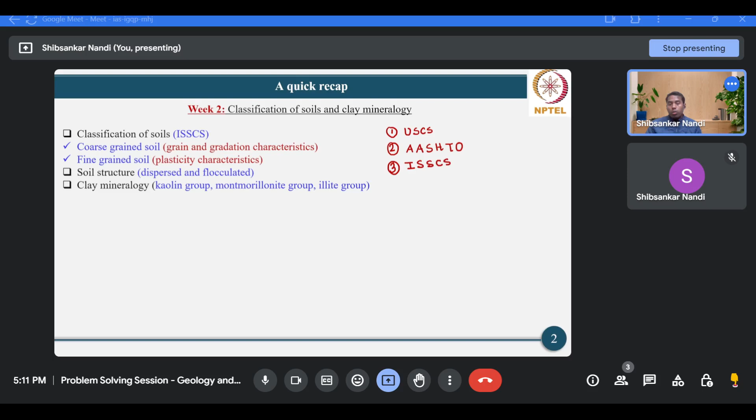And this topic is also very essential for a thorough understanding of soils which contain these mineral groups. Okay, so with this we'll move on to the problem solving part of this session.

As you know, in the last week we started solving a problem which is based on, or framed on the basis of, sieve analysis and hydrometer analysis, and we couldn't solve the problem entirely in that session due to lack of knowledge. By that time we didn't know about the soil classification system, so we restrained ourselves only to the calculation procedure.

Now in this session we'll again start that problem by classifying the soil. Okay, so before that we'll read the problem statement once.

The problem states that 500 grams of soil taken from Kanpur, Uttar Pradesh were brought to a soil lab for testing of grain size distribution. The weight and number of each sieve for sieve analysis is given in table 1.

In table 1, two columns are there. In the first column, sieve size, which are the size of sieves used in the analysis, is given, and in the second column the corresponding sieve weight is also given.

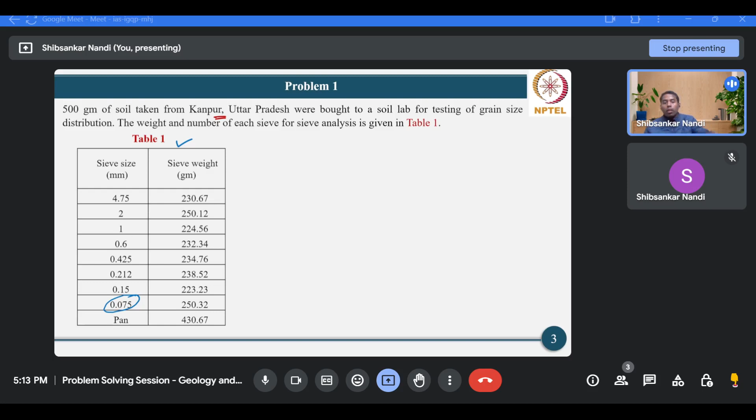Now after the sieve analysis, the weight of each sieve along with the soil is given in table 2. It is to be noted here that during sieving, a small fraction of the sample taken was lost as dust.

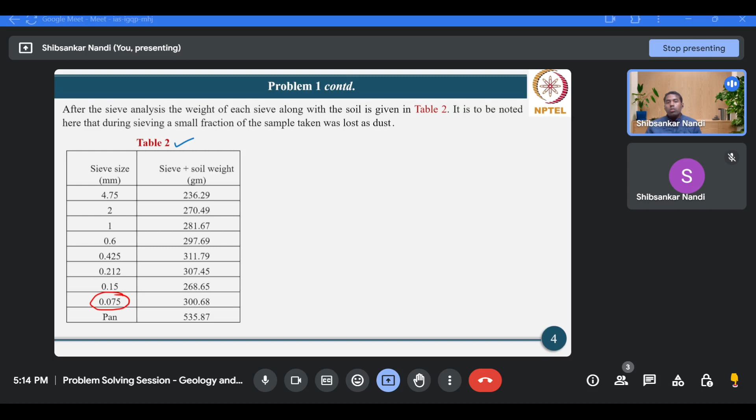In addition to table 1, in table 2, the weight of sieve and the retained soil is given corresponding to each sieve size, starting from 4.75 mm to 0.075 mm. It is explicitly mentioned in the problem statement that while the sieving operation was done, a small fraction of the sample which was earlier taken, that is 500 grams, was basically lost as dust. That we have to keep in mind.

Now coming to the hydrometer analysis part. A hydrometer analysis was performed on the same soil by taking 40 grams of the sample retained in the pan. This is the standard procedure. As you know, this hydrometer analysis is primarily performed for the finer portion or finer fraction of the soil. So there are two different methods.

The first one is sieve analysis, as we have seen, and the second one is this hydrometer part. Sieve analysis is basically performed for the coarser fraction of the soil, and hydrometer analysis is performed for the finer fraction - finer in the sense the portion which has passed through the 75 micron sieve. So the soil retained in the pan, out of this soil, 40 grams was taken for hydrometer analysis.

The hydrometer immersed in a soil solution of 1000 ml was read at specific timings as given in table 3. These are the readings obtained from the hydrometer analysis, summarized in table 3.

In this specific context, we have discussed two very important facts: to proceed further for hydrometer analysis, meaning the calculation part involved, we have to first calibrate the hydrometer. Calibration in the sense we have to first establish a relationship between hydrometer reading and the effective depth. That we'll see.

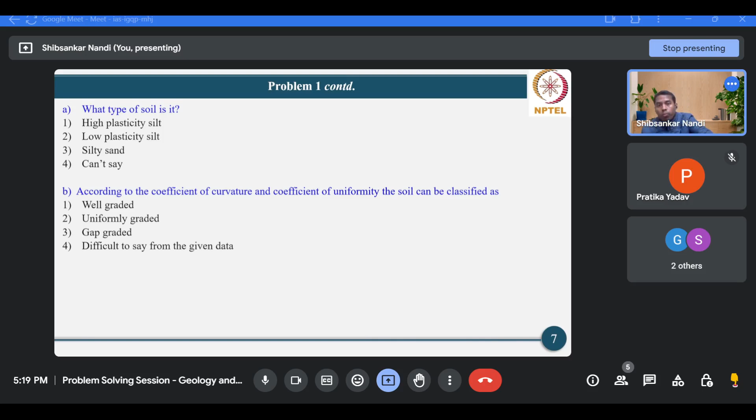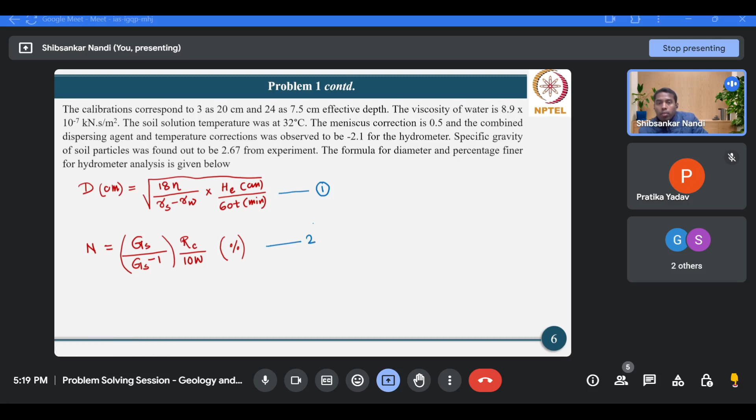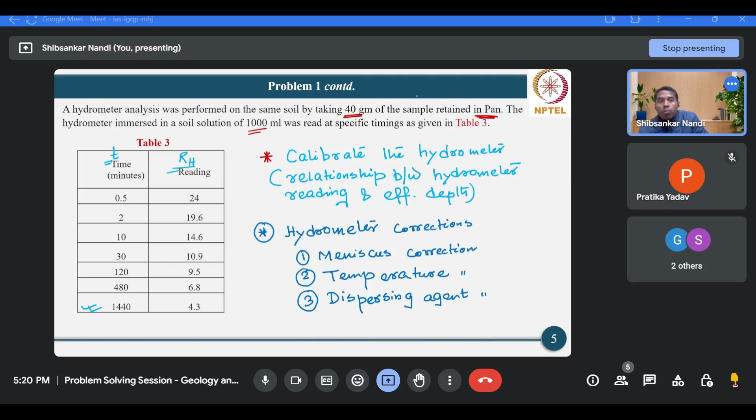The main motto of this problem is to obtain the grain size distribution curve, and depending on that we can make a note whether the soil is well graded, gap graded, or poorly graded, something like that. That is question 1b of this problem. So that's why we have made one correction to get the percentage finer on the total basis.

And how? So in this way, this is the percentage finer with respect to the 40 grams which we have taken. Now this is the fine content, 21.96. How have we got 21.96? So in this way, this much fraction percentage is passing through the 75 micron sieve.

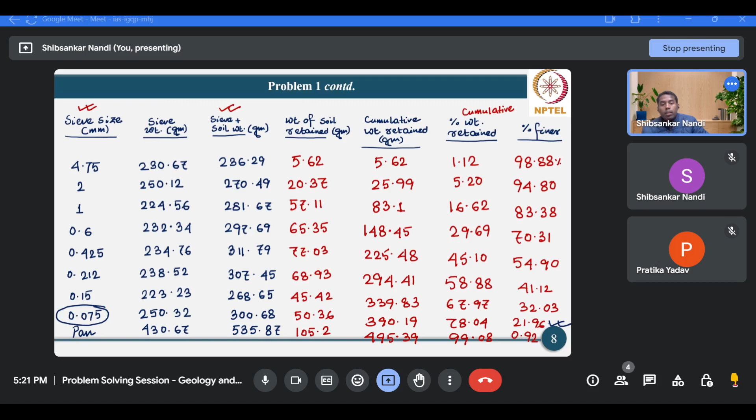Now out of this 21.96 percentage, we have taken 40 grams. So we have multiplied this 21.96 to get it on the total basis, out of 500 grams. This gives how much percentage finer corresponding to a 0.052 millimeter diameter particle. In this way, we have got values like 19.66 and 2.37 corresponding to particle sizes of 0.052 to 0.001.

The actual hydrometer reading or the corrected reading, for time t equals 0.5 minutes, the corrected reading which we have got is 22.4. Now this 22.4 hydrometer reading represents what effective depth? That we can get from this calibration. So if the hydrometer reading is 22.4, then what should be the effective depth? The effective depth should be 8.45 centimeters.

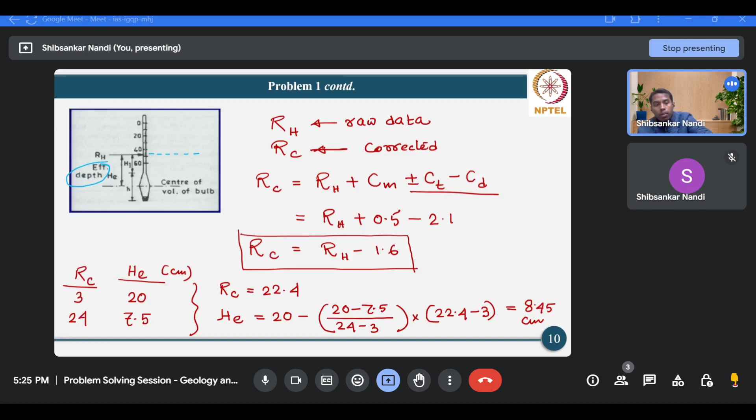Before that, as you know, the first or fundamental step in this ISSCS soil classification system is to categorize the soil sample as to whether it's fine grained or coarse grained.

So for that, we'll first make a division of soil fraction on the basis of grain size.

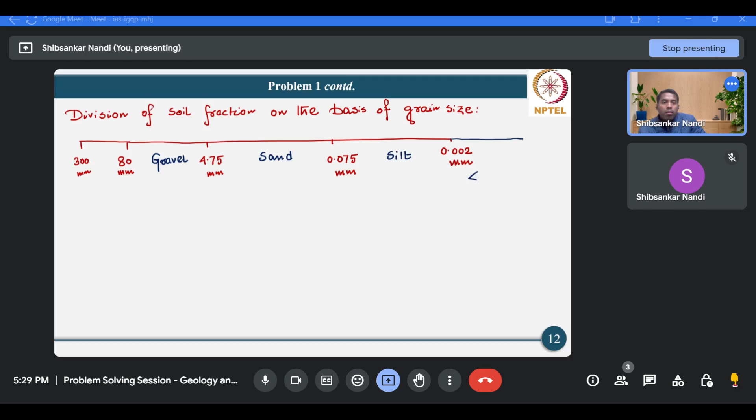Particles of size ranging between 0.002 mm to 0.075 mm, this is called silt. And all particles having a size or diameter less than 0.002 mm, if we extend this line further, falls under the category of clay.

And this division from 80 mm to 300 mm is cobble, and greater than 300 mm is called boulder.

Now again we can subcategorize each of these divisions. Specifically for 4.75 to 0.075, we can make a distinction like coarse sand, medium sand, or fine sand. Similarly, gravel can be categorized into coarse gravel or fine gravel. We are not going into that aspect because that is not needed at all, at least for solving this particular problem.

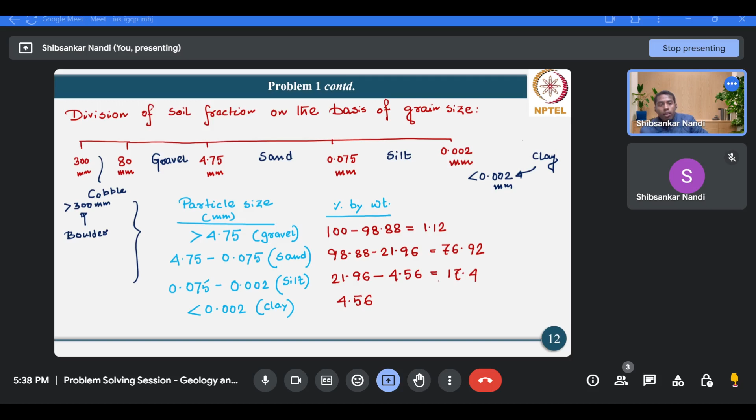Now we'll do the first check: whether 50% of the total soil is passing through the 75 micron sieve or not. Depending on that, we'll categorize the given soil as fine grain or coarse grain. Only 21.96 percentage of the total soil is passing through the 75 micron sieve, meaning more than 50% is retained or is coarser than the 75 micron sieve. So this indicates the given soil sample is coarse grain, not fine grain.

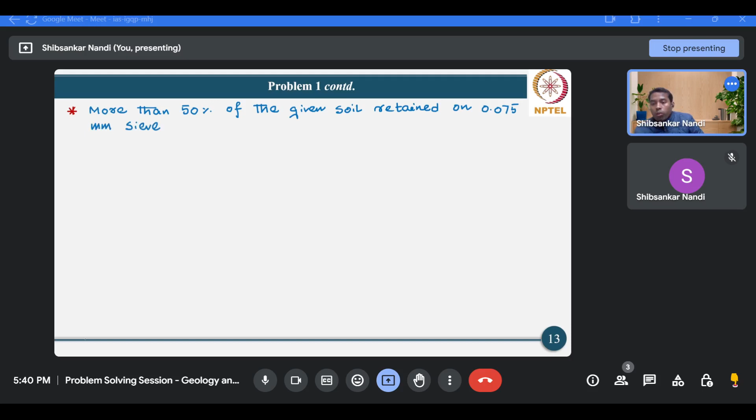So how are we categorizing the given soil sample as coarse grain? Because more than 50% of the given soil is retained on 0.075 mm sieve. We can infer from this observation that the given soil sample is coarse grained in nature.

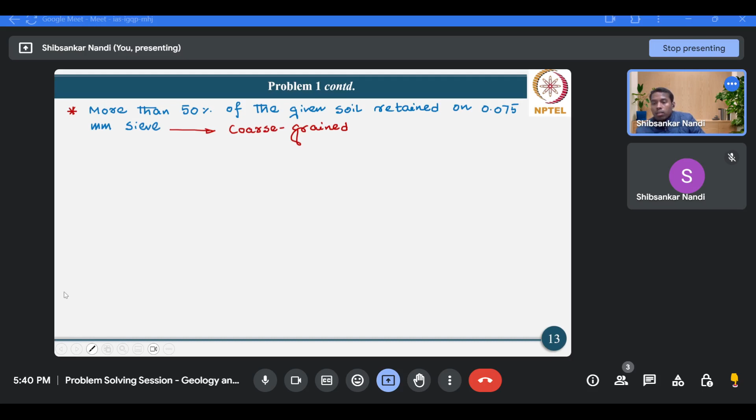Now we'll again subclassify the soil sample. This is the second check. First we classified the given soil sample as coarse grain on the basis that more than 50% of the given soil is retained on the 75 micron sieve.

Now we'll again subclassify. We'll check, out of this coarser fraction, how much percentage is retained on the 4.75 mm sieve, or indirectly how much percentage of this coarse grain fraction is passing through the 4.75 mm sieve. On that basis you can subclassify the soil sample as sand fraction or gravel fraction. In this table I have written NA for these coarse fractions.

So these are the coarse fractions, and these two are the fine fractions. The coarse fraction is 76.92 plus 1.12, that is 78.04 percentage. Obviously the remaining 100 minus 78.04 will be the fine fraction.

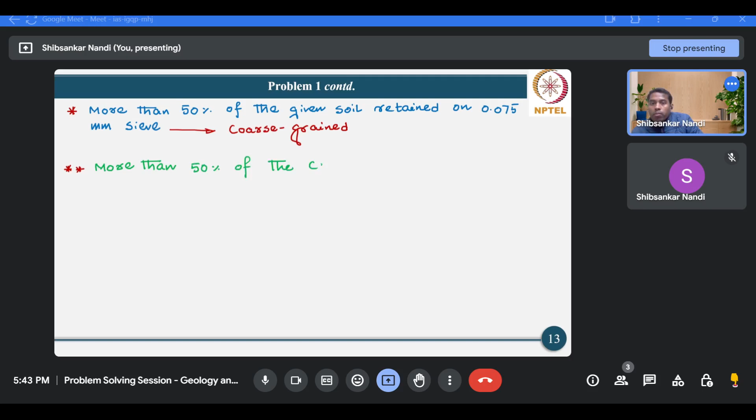On a percentage basis, if we take this 78.04 as 100%, then we can easily say more than 50% of the coarse fraction is passing through the 4.75 millimeter sieve, which indicates the sample is sandy in nature. So our second observation, based on the second check, is that more than 50% of the coarse fraction—particles coarser than 0.075 mm—passes through the 4.75 mm sieve.

Therefore, the soil is sand. So first we have classified the soil sample as coarse grained, then in the second step we have classified it as sand. Now we'll further classify the soil sample.

on the basis of fine content. Once the soil is classified as coarse grained or fine grained, depending on that we decide the next criteria for further classification. For coarse grained soil, gradation and grain characteristics will be predominant, while for fine grained soil the plasticity characteristics will be predominant. So for coarse grained soil you classify on the basis of grain and gradation characteristics, whereas for fine grained soil you classify on the basis of plasticity characteristics.

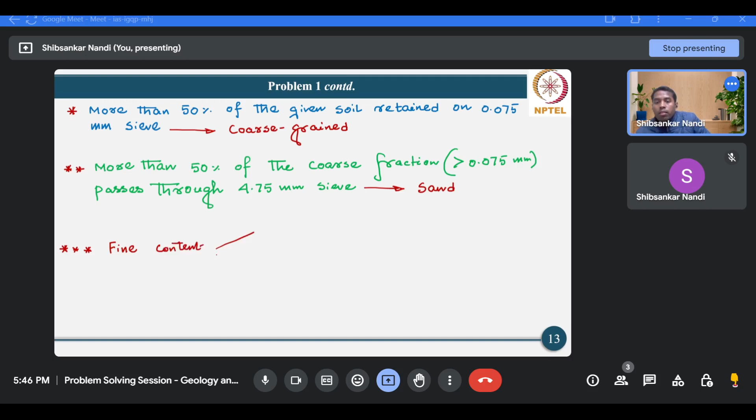Now for the given problem, as the soil is coarse grained and more specifically sandy in nature, we have to go by its grain or gradation characteristics. But before that, we have to check whether the fine content is less than 5%, or in the range of 5 to 12%, or more than 12%. These are the three checks for further classification of the given soil sample.

5%, 5 to 12%, and more than 12%. If the fine content is less than 5%, you classify the soil sample as well-graded sand, poorly graded sand, well-graded gravel, or poorly graded gravel. For the given problem, since the soil is sandy in nature, you apply either poorly graded sand or well graded sand.

But that is only for the case when the fine content is less than 5%. This is not the case here. You can easily observe the fine content. Now what does fine content represent? The fine content is the fraction of the total soil passing through the 75 micron sieve.

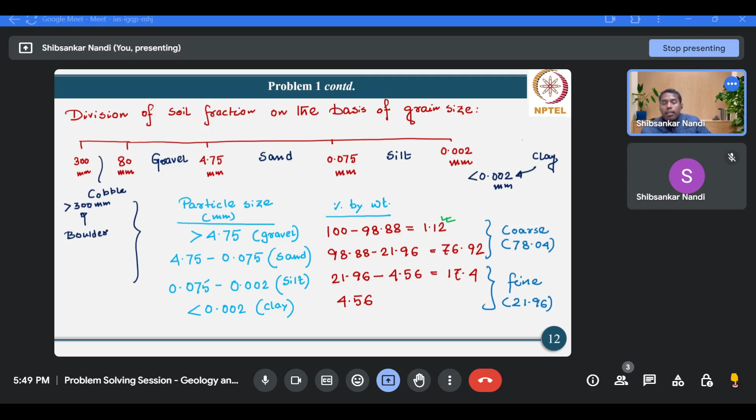However, roughly we can say, because as you can see from this table, out of this 21.96 fine content, the silt percentage is 17.4, whereas the clay percentage is 4.56. So very nominal, the clay percentage is very small. Therefore, at this moment you can say that the soil is silty sand.

So here I am writing that the silt percentage, this is the valid case for this problem. I am highlighting that percentage silt is greater than percentage clay. So clay is 4.56 and the silt percentage is 17.4.

So roughly we can say that the soil is silty sand. And what would be the group symbol for this type of soil? The group symbol would be SM. The prefix S indicates sand and the suffix M indicates silt. So the soil is silty sand.

So this is the correct option, option 3, this is the correct answer. So what type of soil is it? The soil is silty sand. That means option 3 is the correct answer.

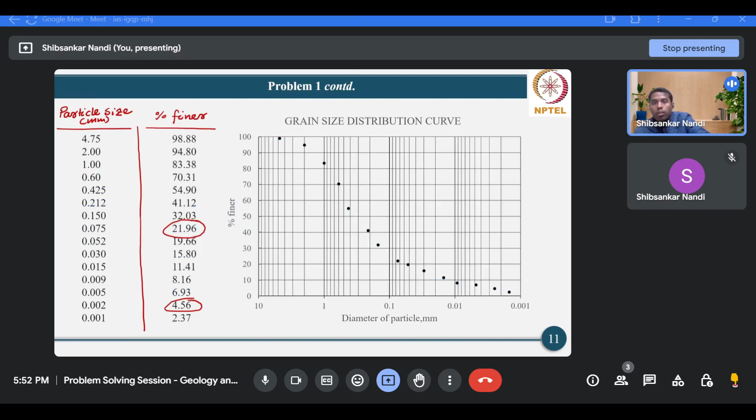Now this is - for this part the data of problem 2 is required, so that we'll see later. But before that, we'll address the second question: according to the coefficient of curvature and coefficient of uniformity, the soil can be classified as well graded, uniformly graded, gap graded, or difficult to say from the given data. So we'll concentrate on this aspect now.

This is the grain size curve. Now you have to make a statement on the gradation characteristics of the given soil on the basis of two constants: the coefficient of uniformity, Cu, which is the ratio of D60 by D10, and the coefficient of curvature, represented as D30 squared divided by D60 into D10.

Now what are these D10, D30, D60? These are nothing but the particle size corresponding to 10% finer, 30% finer and 60% finer respectively.

So if we denote D60, D10 and D30 on this grain size distribution curve, you can draw a horizontal line from 60% finer. From the value of 60% finer, draw a horizontal line, and the line intersects the grain size distribution curve at this point. The particle size corresponding to this intersection point would give you the D60 value.

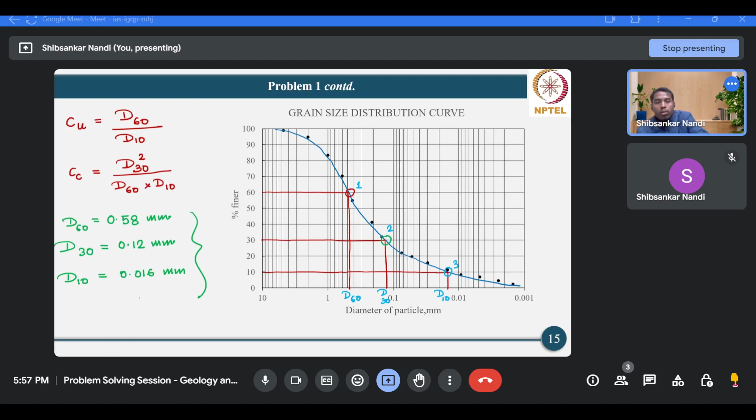Now we'll calculate this value Cu and Cc. So Cu, this would be 0.58 by 0.016. So 0.58 by 0.016, this is 36.25.

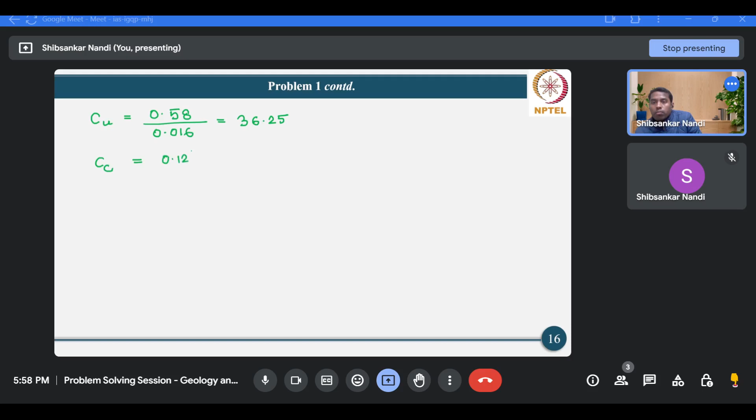And Cc, D30 squared, that means 0.12 squared divided by 0.58 into 0.016. So that means 1.55.

Now, what is the criteria based on which we can make a comment on its gradation properties or gradation characteristics, whether the soil is well graded, gap graded, or poorly graded? What is that criteria? Since the soil sample is sand, for sand, if the Cu value is greater than 6, and if the Cc value is in between 1 to 3...

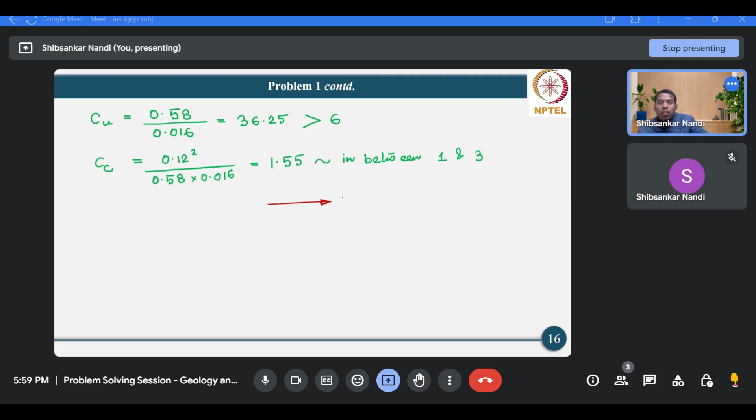Now, without calculating these two parameters, that is the coefficient of uniformity and coefficient of curvature, you can still classify or comment on its gradation characteristics only by observing the grain size distribution curve.

As you can see, the present grain size distribution curve covers particles having size over a broader range. So the given soil sample has particles of size over a broader range, basically containing varieties of particles. So you can say that the given soil sample is well graded.

Now if this is not the case, for poorly graded you will be having a curve something like this. If I draw it for poorly graded, then the soil is deficient or has excess particles of a particular size, or we can say all the particles are basically having the same size. So the gradient will be very steep. This is for the poorly graded case.

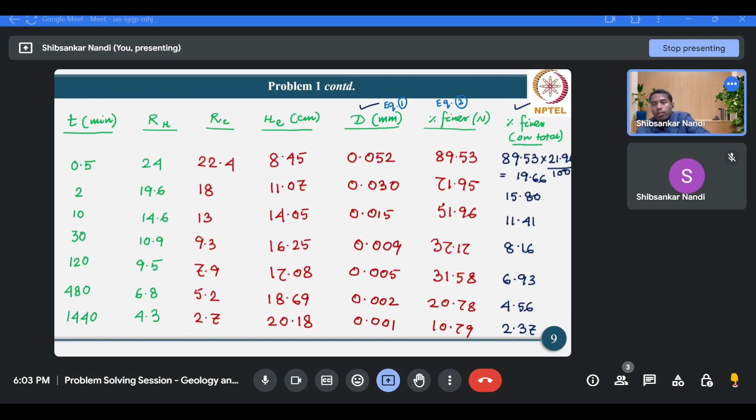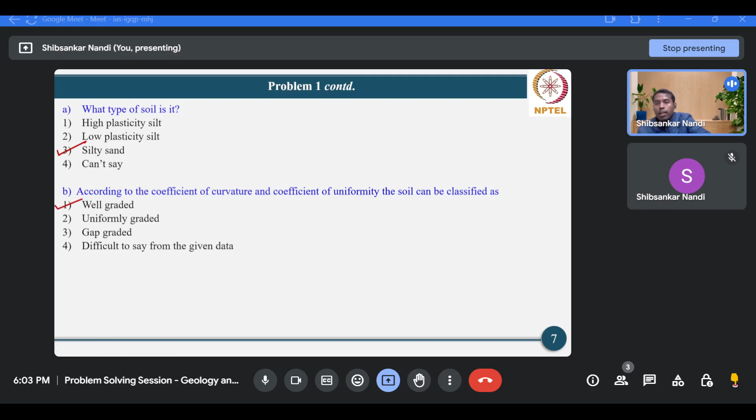Now for this problem, since the Cu value is greater than 6 and the Cc value is in between 1 and 3, the given soil is obviously well graded. So this option is correct, option 1 is correct. According to the coefficient of curvature and coefficient of uniformity, the soil can be classified as well graded. So option 1 is the correct answer.

So far we have addressed the two questions which were framed in the last class. Now we'll go for the second problem. The second problem is about the Atterberg limit test conducted on the soil sample given in problem 1, that is the same soil we are dealing with.

For liquid limit, the data set obtained for the soil is given in table 4. The plastic limit for the soil is 23. Assume the soil to be fully saturated at liquid limit and plastic limit. If the oven dried remolded soil of 250 cc volume kept for 24 hours in oven weighs 595 grams, what is the shrinkage limit of the given soil? That means you have to determine the shrinkage limit of the given soil, where the plastic limit and liquid limit of the soil are given.

The plastic limit is given directly for this problem. However, the liquid limit is not given directly, but you can obtain this liquid limit from the data given for this problem, that is, number of blows versus water content. Now before determining all these limits, we'll have a quick look at what Atterberg limits are.

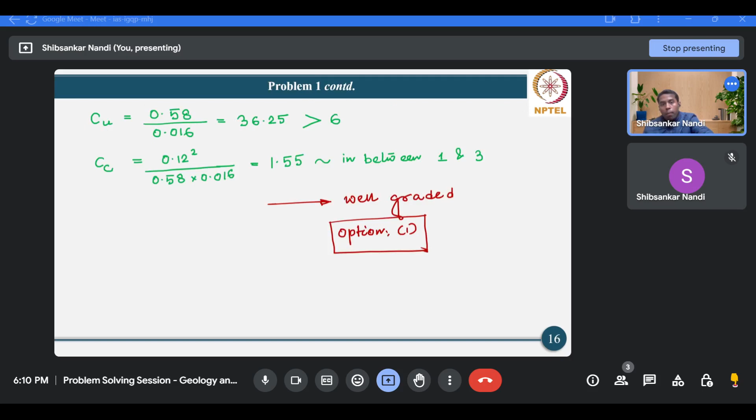Now we'll cross check the soil classification from the first problem, because for a more accurate classification we have to consider the location of the soil in the plasticity chart, whether it is plotted above or below the A line, since the fine content in that problem was more than 12%. We had classified the soil sample approximately as SM, so we will re-verify that.

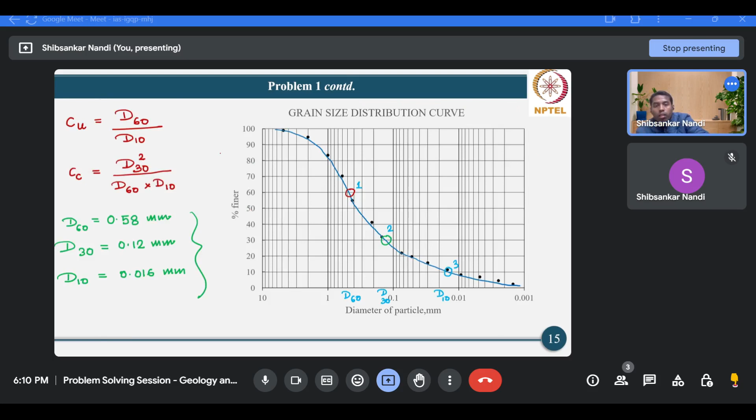Now what is the WL for the given soil sample? WL is 27 and WP is 23, which means the plasticity index is 4.

The equation gives 0.73 times WL minus 20, that is 0.73 into 7, equals 5.11. So corresponding to a liquid limit of 27%, the plasticity index from the A line equation is 5.11, but here the actual plasticity index value is 4.

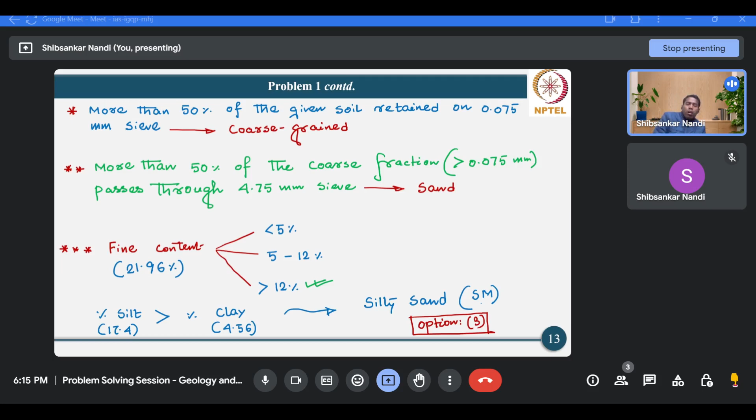So the soil is plotted below the A line, which means the fine content is silty in nature, and as a whole we classify the soil sample as silty sand, which we have done earlier. So that means the earlier classification was correct. This was a check to see whether we had done it correctly, and we can conclude it was correct.

Now we'll see how we can determine the shrinkage limit by utilizing the data of problem 2. So for determining the shrinkage limit, we first obtain the plastic limit and liquid limit.

The plastic limit is given as 23%, and the liquid limit we determined by plotting the water content versus number of blows data to obtain the flow curve. In this flow curve, the water content corresponding to a number of blows of 25 gives you the liquid limit, and that is 27%.

Now we'll basically have an idea about the volume change versus water content, because this idea is very much needed before determining the shrinkage limit of the given soil.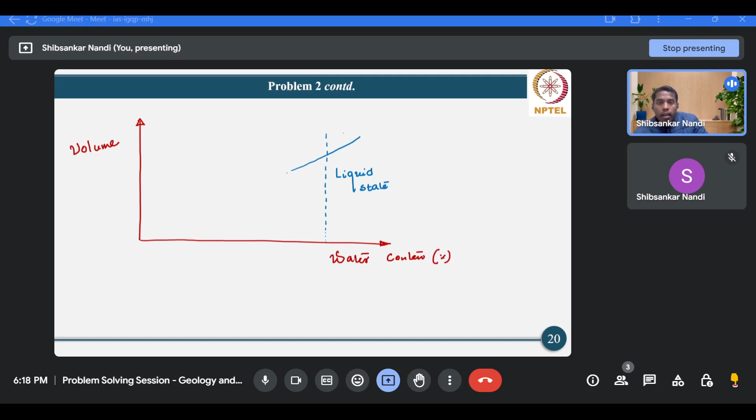Suppose this is the liquid state, where the soil suspension can easily flow without resistance, meaning sufficient water is present and the water content is too high. Now if you try to reduce the water content of the suspension, the volume will accordingly decrease, and there is a borderline where the soil basically enters into a plastic state from the liquid state.

Now what does plastic state indicate? It's the consistency of a soil where the soil can be deformed into different shapes without any fracture or rupture. That state is designated the plastic state.

And the borderline water content, as we defined earlier, is the liquid limit, which is the water content that is the borderline between these two states, that is the liquid state and the plastic state.

First let me plot the variation of volume with water content. So these are the different states of a soil: liquid state, plastic state, semi-solid, and finally solid.

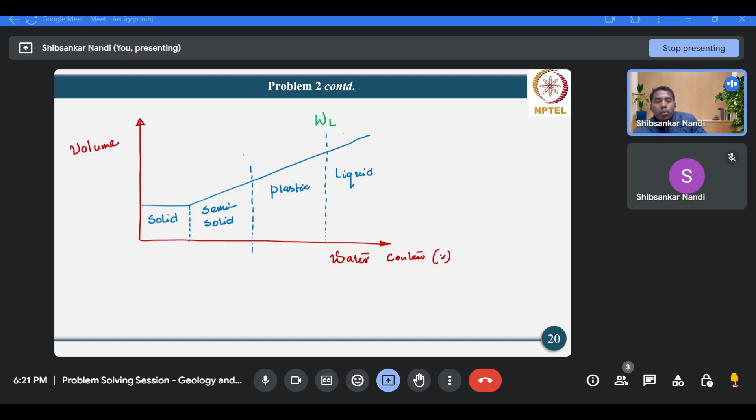Now this borderline water content between liquid state and plastic state is called the liquid limit of the soil. Similarly, the borderline water content between plastic state and semi-solid state is called the plasticity limit or plastic limit.

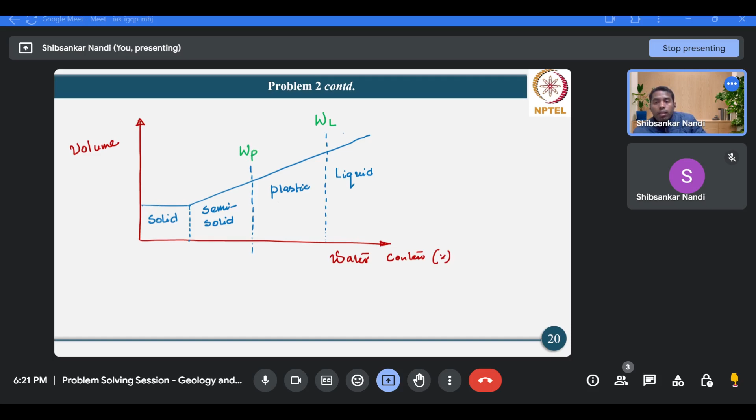And the water content between solid state and semi-solid state is called the shrinkage limit. So these are the three Atterberg limits which define the borderline between different states of a soil.

So the borderline between liquid and plastic state is called the liquid limit. Between plastic and semi-solid, the water content at which soil enters semi-solid state from plastic state is called the plastic limit. And the maximum water content below which there is no change in volume is called the shrinkage limit.

So these are the three Atterberg limits you can get from this volume versus water content plot. If you decrease the water content, the soil consistency changes from liquid to plastic, then semi-solid and solid state, giving you the liquid, plastic and shrinkage limits. Now in this problem, the liquid limit and plastic limit are known to you.

What you have to do is basically calculate the shrinkage limit of the soil, and that we'll see how we can calculate the shrinkage limit of the soil.

Before that, we'll basically plot the three-phase diagram of a soil sample. So again, we'll go back to the problem statement, and we can observe that there is an explicit statement in the problem that we assume the soil to be fully saturated at liquid limit and plastic limit.

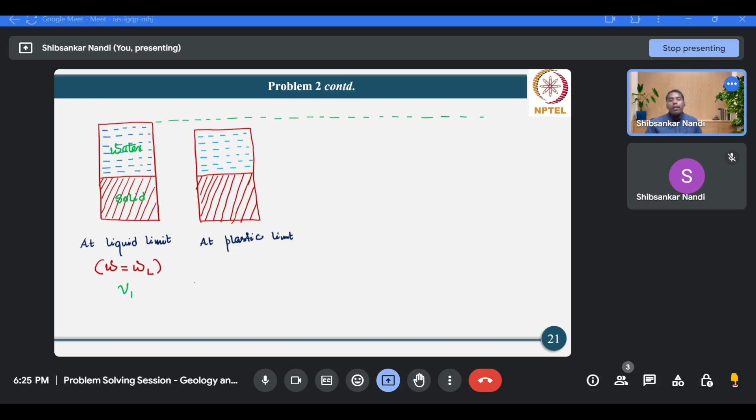Now consider the case of plastic limit. What happens here? In plastic limit, the water content is nothing but the plastic limit, and it is lesser than the liquid limit, that we know. And what happens to the total volume of the sample? The volume is now reduced compared to the volume at liquid limit. So at liquid limit, if the volume is V1, in this case you will be having a volume V2, which is lesser than V1.

So with a decrease in the water content, your volume is also reduced, and that is pretty much clear from this graph. As you go on decreasing the water content, your volume is also decreasing.

Now keep in mind this reduction in volume is only due to reduction in the volume of water, because solid content cannot change. Whatever volume of solid is present, that will remain constant irrespective of these limits: liquid limit, plastic limit, shrinkage limit. Only the volume of water is basically changing inside the voids, and that will be reflected in the total volume of the soil sample.

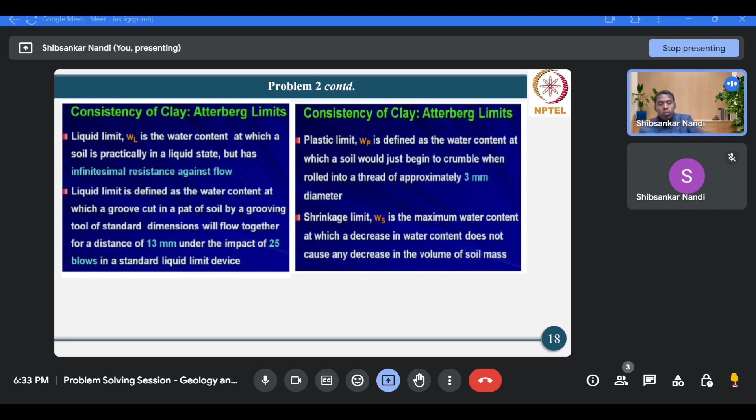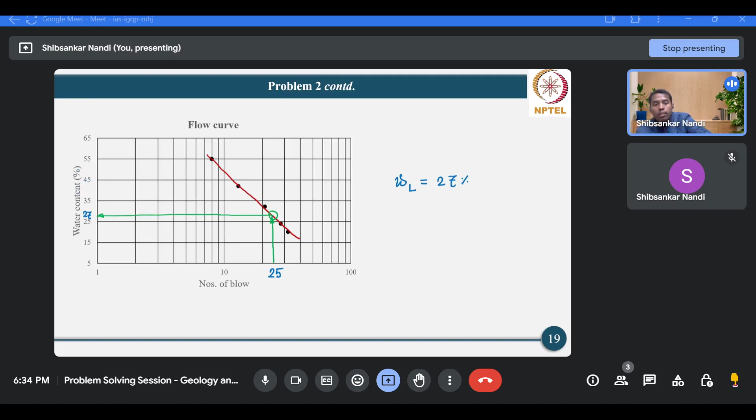Now what we will do is, we have an understanding of the behavior of void ratio versus water content. Now since we know the void ratio at all the stages, how do we know? Because for full saturation, this is the relationship.

W times GS equals to S times E. Now for full saturation, S becomes 1. So therefore you can write E equals to W times GS.

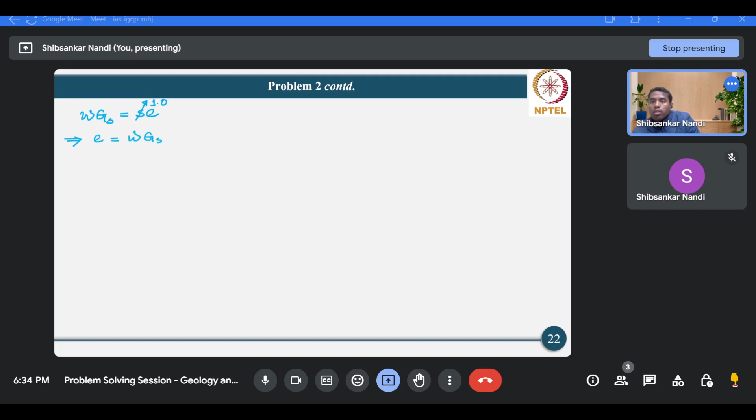Now, as you know the liquid limit and plastic limit of the soil sample, and the specific gravity of soil solids, you can easily calculate the void ratio corresponding to these two states, that means plastic and liquid limit.

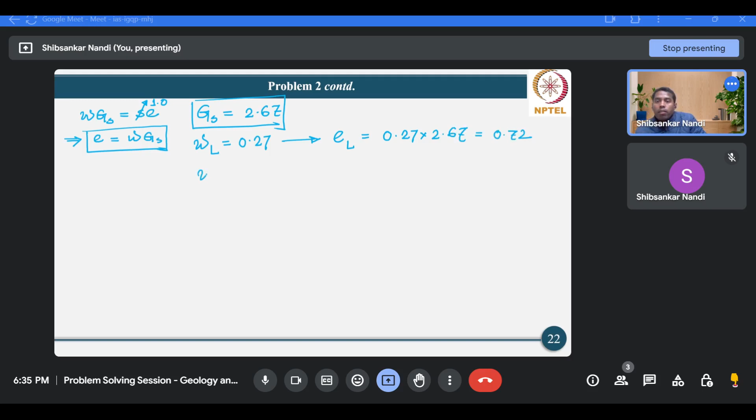So GS value is 2.67, given in the problem statement, and WL is 0.27. It will give you the void ratio at liquid limit as 0.27 into 2.67, that means 0.72. And WP equals to 0.23, so it will give you EP, the void ratio corresponding to plastic limit, as 0.23 into 2.67, that means 0.61.

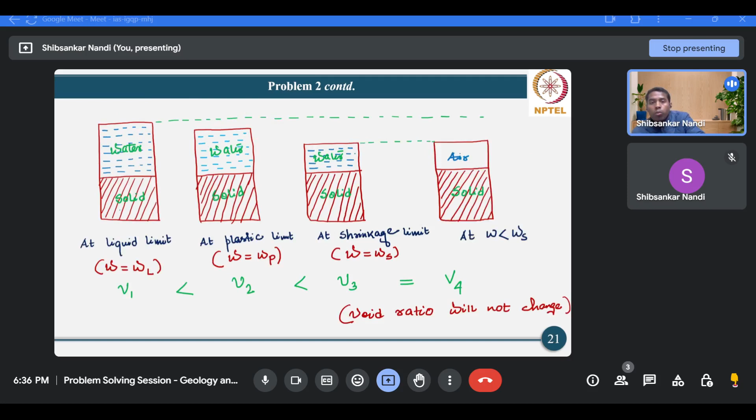So you know the liquid limit and corresponding void ratio, plastic limit and the corresponding void ratio of the soil. Again, you know the void ratio corresponding to the dry state. How? Because you know the volume of the dry soil sample and the weight of the dry soil sample, so gamma dry you can calculate by WD divided by V.

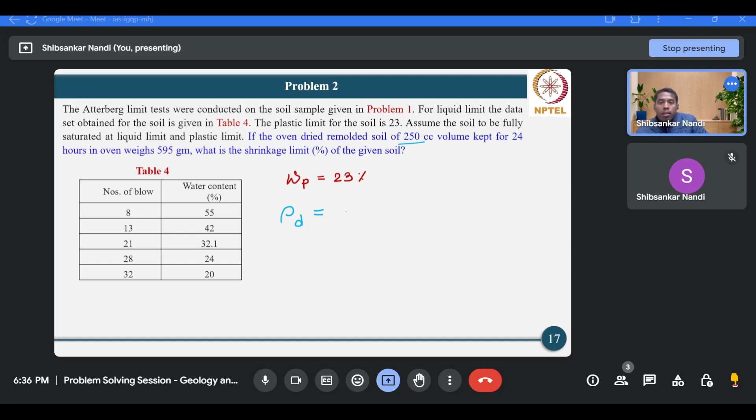So instead of gamma, we can take rho D, the density. So dry density is nothing but 595 grams divided by 250, that means 2.38 grams per cc.

Now, if this is the dry density of the soil, there is a relationship between dry density and the corresponding void ratio of the soil sample, that is rho D is basically GS rho W by 1 plus ED. So ED you can calculate as GS rho W by rho D, minus 1.

That means 2.67 into 1 divided by 2.38, minus 1, that means 2.67 divided by 2.38, minus 1, equals 0.112.

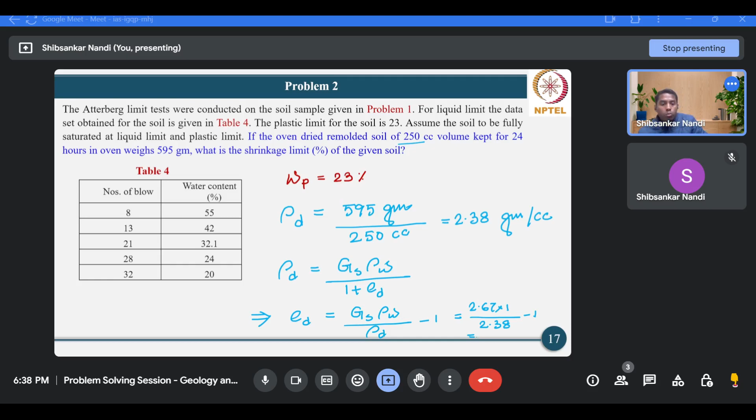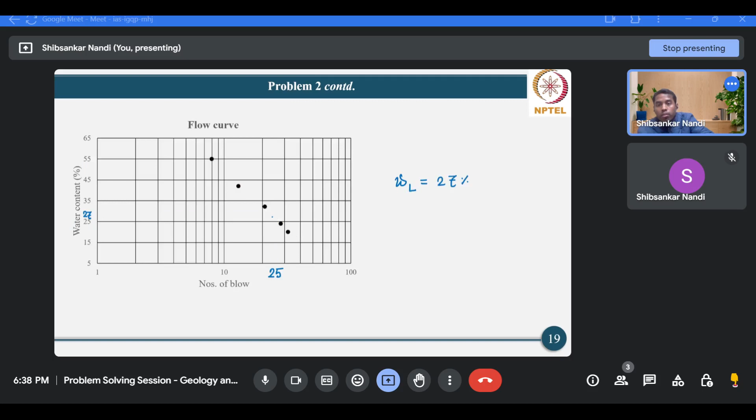And this void ratio is not changing over the solid state. So this is the dry void ratio, or void ratio corresponding to the dry state, you can say ED, and the value is 0.112. That means indirectly you know the void ratio corresponding to the shrinkage limit of the soil sample, and that is 0.112, because ED is not changing over the solid state, just as the volume of the soil is not changing over the solid state, similarly the void ratio of the soil is not changing over the solid state.

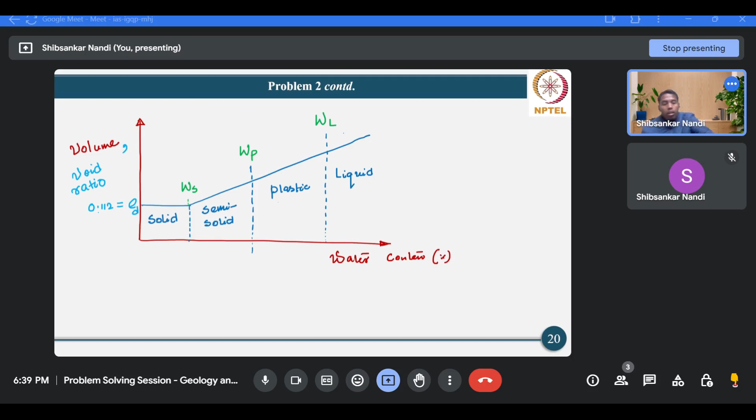So that means you can calculate the water content corresponding to this void ratio. So ED is 0.112. Then we can determine the value of WS from an extrapolation of these two data. Suppose, let me redraw the curve here. So this is water content, and this is void ratio, and the behavior is like that.

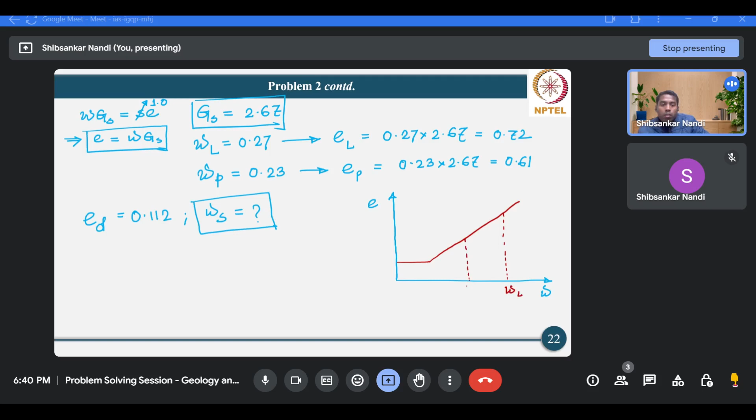So this is WL, this is WP, this is WS. Okay, so this is EL, this is EP, this is ED.

So these two data points you know, and this point you know partially because you know the ED. So you can easily calculate the WS value. By extrapolating these two data, data 1 and data 2, you can obtain the data at point 3.

So this ED, this WS, you can calculate in this fashion. It will be 0.27 minus, this is the gradient of the line, straight line, 0.27 minus 0.23 divided by WL minus WP, EL minus EP, that means

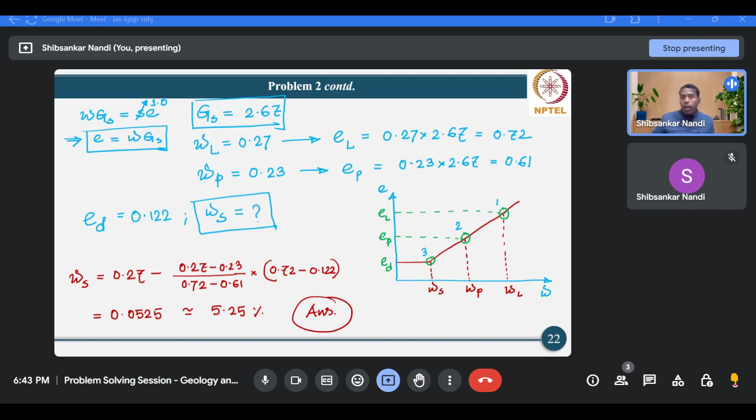Now we'll proceed further. So we'll take this problem 3. In problem 3, a fine-grained soil is found to be plastic in the water content range of 26% to 48%. As per Indian standard classification system, the soil is classified as. And this question was asked in GATE examination 2016.

Okay, so you are given a fine-grained soil, which is found to be plastic in the water content range of 26% to 48%, and you have to identify, or classify the soil sample as per the Indian standard classification system. So this is the question.

Now what we will do first? It's a very simplified version. Why? Because here you need not consider the sieve analysis or the hydrometer analysis data, because in this problem it's given in a very straightforward manner that the soil sample is fine grained. So you need not bother about the sieve analysis and the hydrometer analysis data, because that is required only to classify, or to get an idea about what type of soil it is at the very first check.

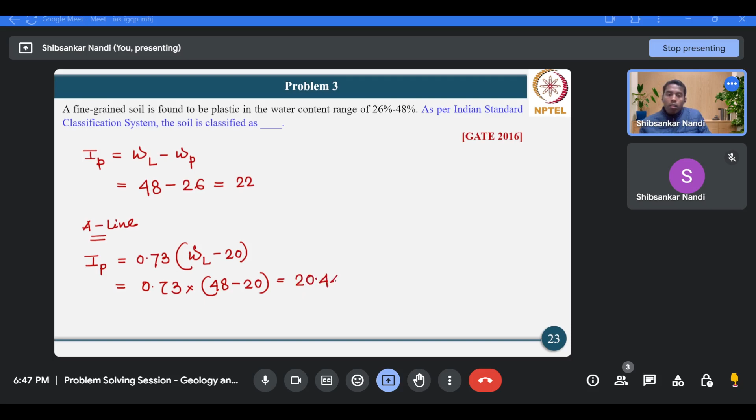Now if we plot this soil in the plasticity chart, obviously this soil will be plotted above A line since it's having a plasticity index of value 22, which is greater than the value 20.44 corresponding to the A line. So the soil is plotted above A line, so it's clay in nature.

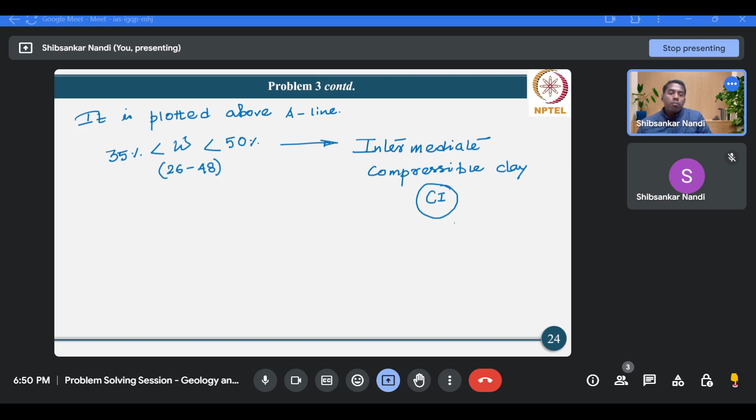And the group symbol for this kind of soil is CI. So it will basically fall in this range. If I extend this line, this is 35% water content, and this is 50%, and again this is plotted above A line, so 22, somewhere here. So it will be plotted above the A line, and the water content is in the range of 35 to 50%. So that's why the soil can be classified as CI. This is the group symbol for the soil classification, CI.

And what is the physical significance of CI? CI indicates clay with intermediate compressibility. The soil can be classified as CI.

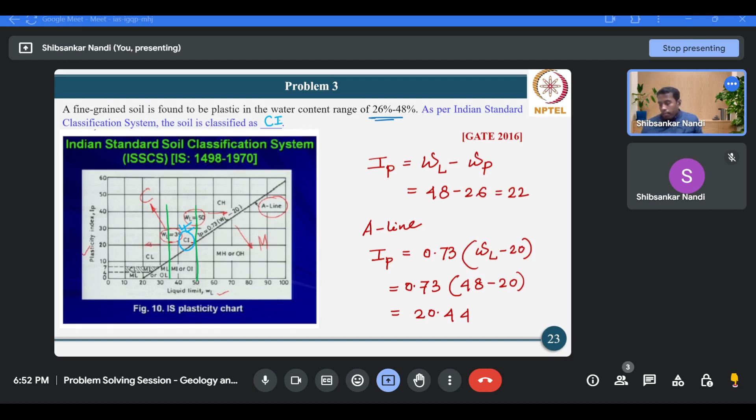Now we will take the next problem. The next problem is about sieve analysis. A sieve analysis on a dry soil sample of mass 1000 gram showed that 980 gram and 270 gram of soil passed through 4.75 mm and 0.075 mm sieve respectively. The liquid limit and plastic limit of the soil fraction passing through 425 micron sieve are 40% and 18% respectively. The soil may be classified as.

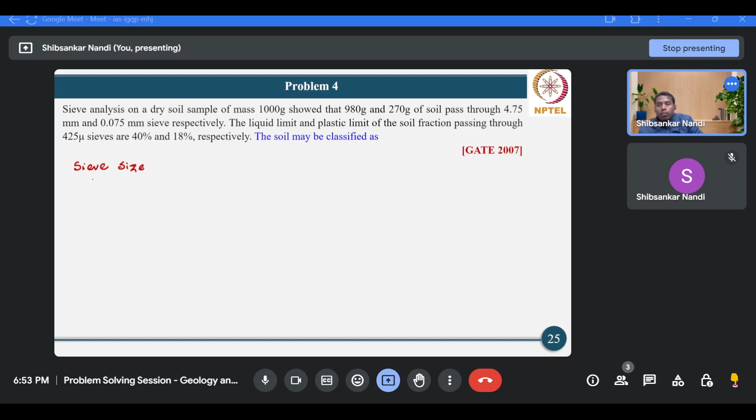This question was asked in GATE examination 2007, and in this question, first we have to determine the percentage finer corresponding to these two sieve sizes, 4.75 and 0.075 mm. Since our first check would be whether the soil is coarse grained or fine grained, here I can make a table like this: sieve size.

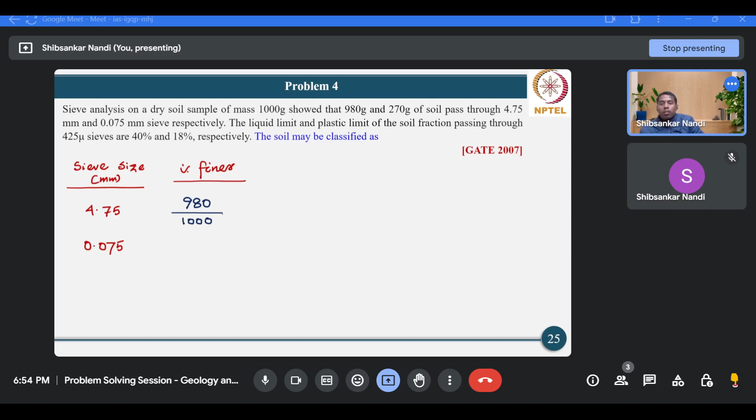So for that we have to calculate the percentage finer corresponding to 4.75 and 0.075 mm respectively. Sieve size, then percentage finer. Sieve size is 4.75 and 0.075. Now for 4.75, 980 gram out of 1000 gram was passing, so percentage finer would be 980 divided by 1000, that is 98%, and that for 75 micron sieve is 270, that is 27%.

Now what we can observe is that the soil is obviously coarse grained, because more than 50% is retained on 75 micron sieve. Only 27% is passing through the 75 micron sieve, so almost 73% is retained, which is more than half of the total soil, therefore it is coarse grained. Again, out of this coarser fraction, 98% passes through 4.75 mm sieve, so only 2% is retained on 4.75 mm, therefore it's sand. The soil is coarse grained, and further the soil is sand.

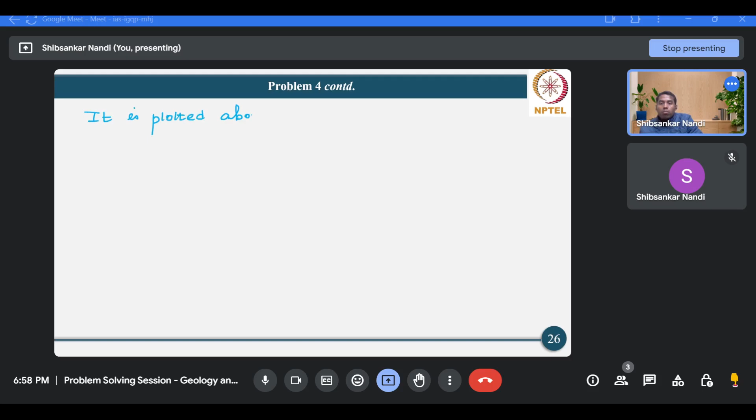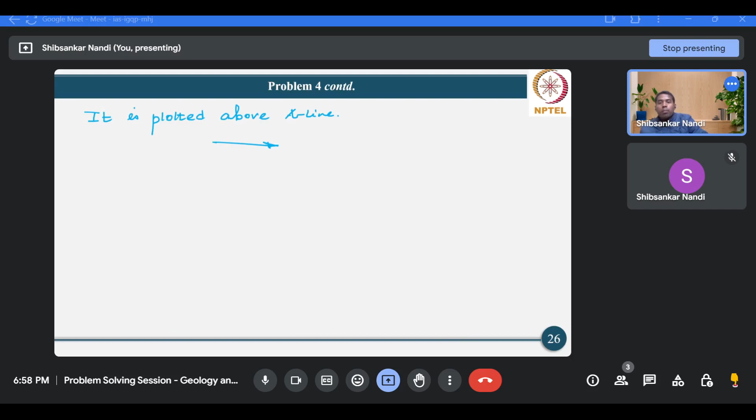So it's plotted, the soil is plotted above A line. Since it's plotted above A line, it means the fine content is clay in nature. So we can classify the soil sample as clayey sand, and the group symbol for this classification would be SC. So this is the answer.

For this problem, first we determine whether the soil is coarse grained or fine grained. The soil is coarse grained because more than 50% of the total soil is retained on the 0.075 millimeter sieve. Then we identify whether the soil is sand or gravel, and we see it is sand because 50% of the coarser fraction passes through the 4.75 mm sieve.

For the third check, we determine whether the fine content is less than 5%, between 5 and 12%, or greater than 12%. The fine content for this problem is more than 12%, so we have to locate the soil sample with respect to the A line. As we can see, the soil is plotted above the A line, so the fine content is clay in nature.

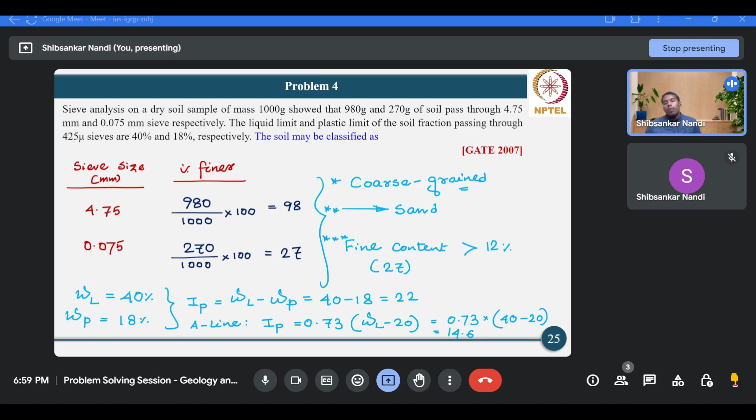So as a whole, we classify the soil as clayey sand, and the group symbol for this classification is SC, where the prefix S indicates sand and the C indicates clay.

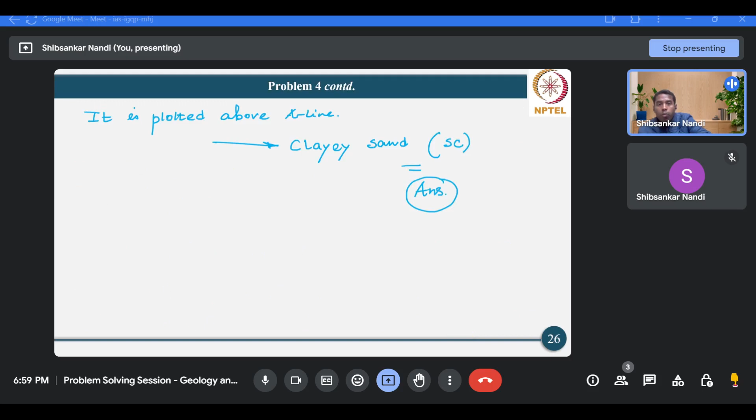Now we'll proceed to the last problem, problem 5: the clay mineral whose structural units are held together by potassium bond. Four options are given: illite, kaolinite, montmorillonite, and none of the above. To answer this, we first need a brief idea about the atomic structure of these clay minerals. We'll start with kaolinite.

Kaolinite is a 1:1 mineral because the basic structure is one silica sheet embedded with one alumina sheet. The other two, illite and montmorillonite, are called 2:1 minerals, meaning the basic structure has two silica sheets and one alumina sheet. We'll see one by one how the atomic structure looks for these clay minerals, starting with kaolinite.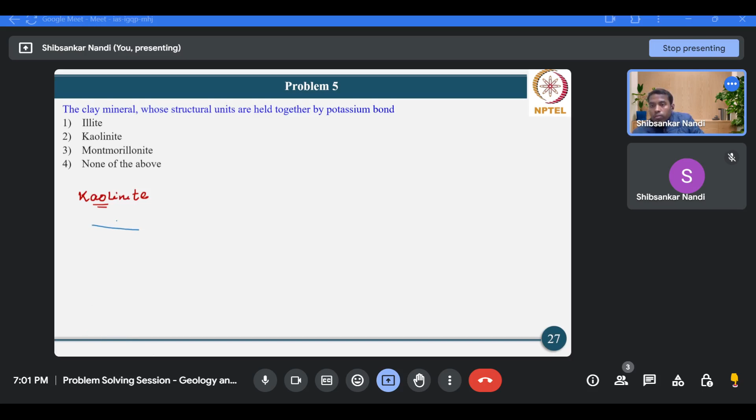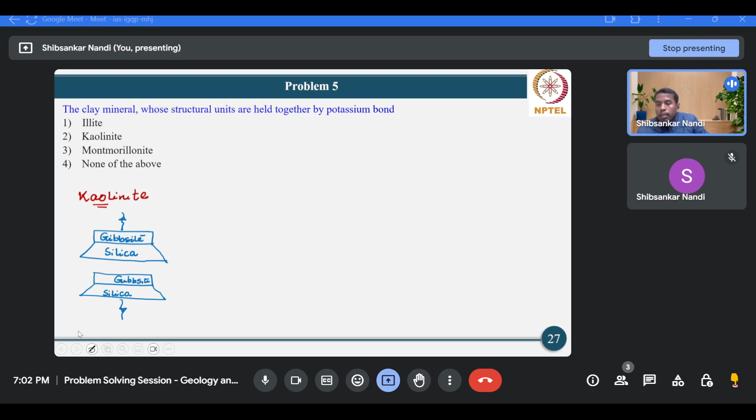This structure is repeating in both directions. The interlayer between these structures is held together by hydrogen bond.

Whereas for montmorillonite, the structure would look like this: two silica sheets and one gibbsite sheet, using the abbreviated form. And this interlayer, these two structural units, are held together by poor van der Waals force.

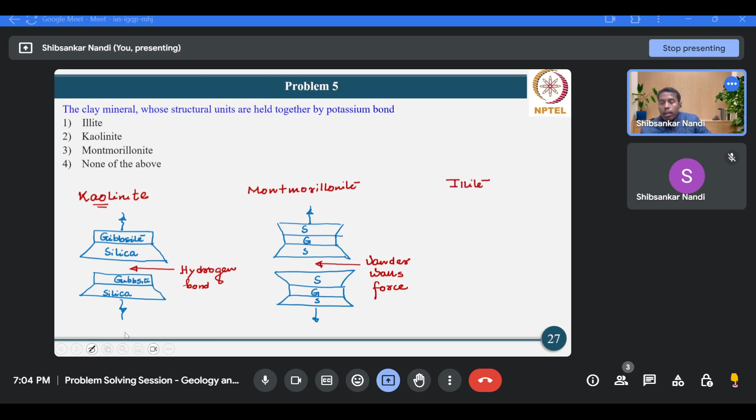For illite, it's again a 2:1 clay mineral, meaning the basic structural unit looks the same as in montmorillonite. However, there is a major difference in the bonding between the two structural units. In contrast to montmorillonite, the bonding in illite is by potassium ions.

So in montmorillonite clay mineral, the structural units are held together by poor van der Waals force, whereas in illite, they are held together by potassium bond. So the clay mineral whose structural units are held together by potassium bond is illite. Option 1 is the correct answer.